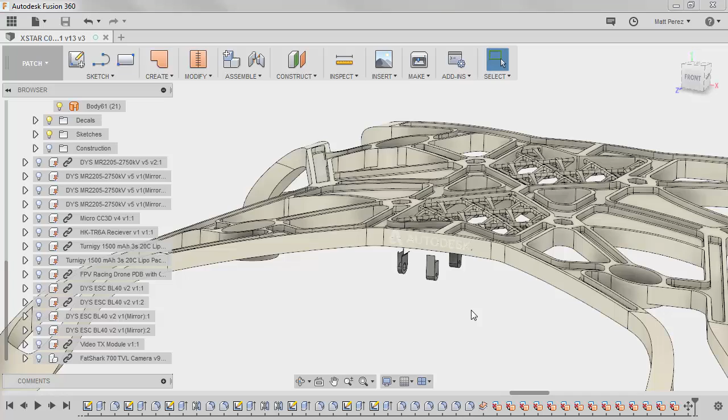Now that we have our copied surfaces or our offset surfaces, we want to start to create solid bodies from those. So the first thing I want to do is start building the solid bodies, and take them up into the rest of the X star body. So I'm going to delete this fillet as well, and start with this edge here.

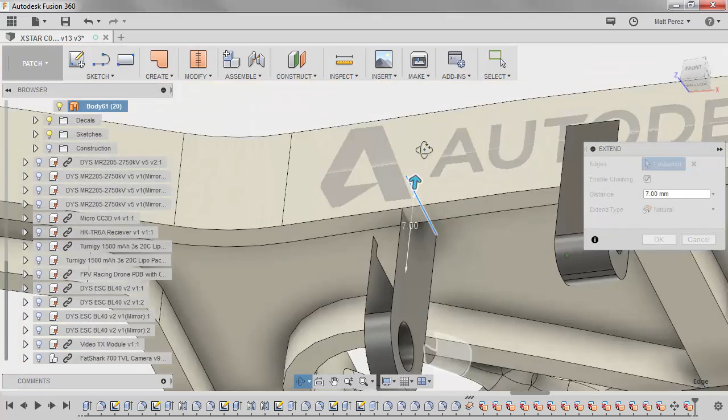I'm going to go to Modify, Extend. I'm going to take this edge up until it hits the inside of the solid body. Remember, it's okay to have a little bit of overlap, and it actually helps out as long as we don't go too far. So we're going to use 7 millimeters, and say OK.

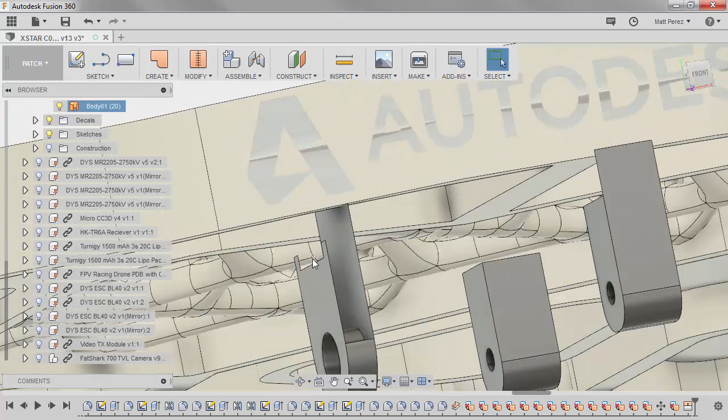So what this does is give me a good reference for where the rest of the body needs to sit. We're going to do Extend again, and take this edge and pull this one up. Notice that 1 millimeter perfectly lines up with this edge. I'm going to say OK.

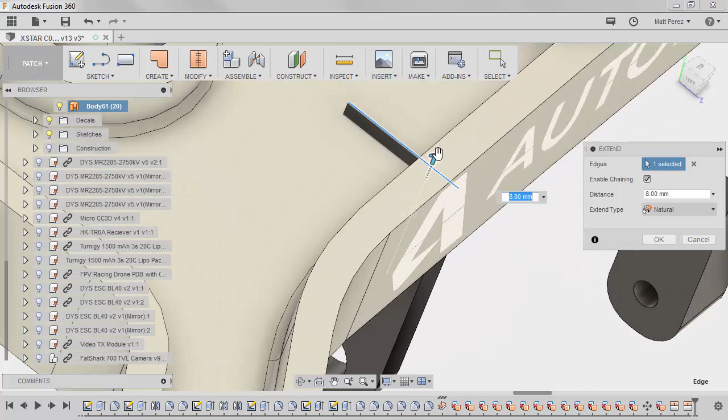I'm going to repeat the command. Now I have a single edge that I can pull up, and this time it's going to go up 8 millimeters. Notice that 8 millimeters comes up through the top, so we'll take it down to 6 millimeters.

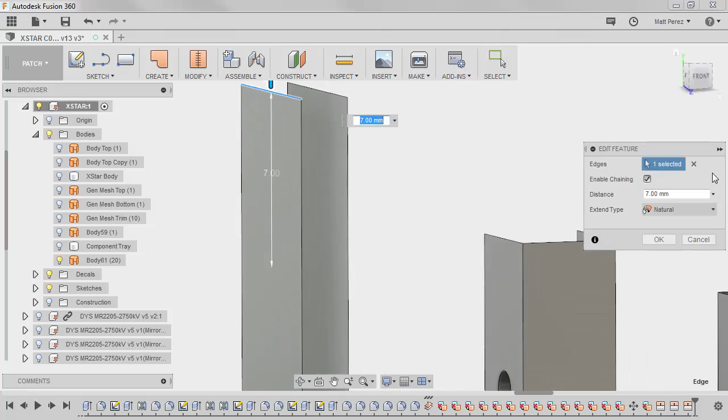We'll say OK. Now I want to temporarily hide the X star body. I want to make sure that these end up at the same level. So I'm going to edit the last command, and note that if I take it to 7 millimeters, it'll still be inside the X star body, but what we're actually doing is taking them up to the same level.

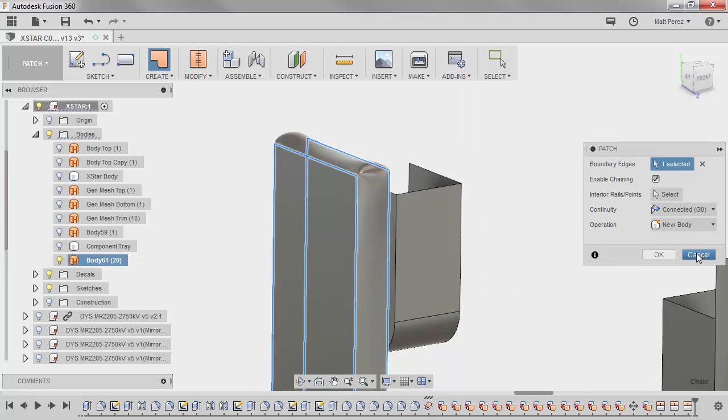Next, I'm going to build a patch between the two. Now you notice that if I select this entire thing, it doesn't allow me to keep these sharp corners here. So in order to connect those, what we can do is loft from one side to the other and say OK. Now we can build a patch for this opening on the side. Notice when I do this, it's trying to select the entire opening because we have enabled chaining on.

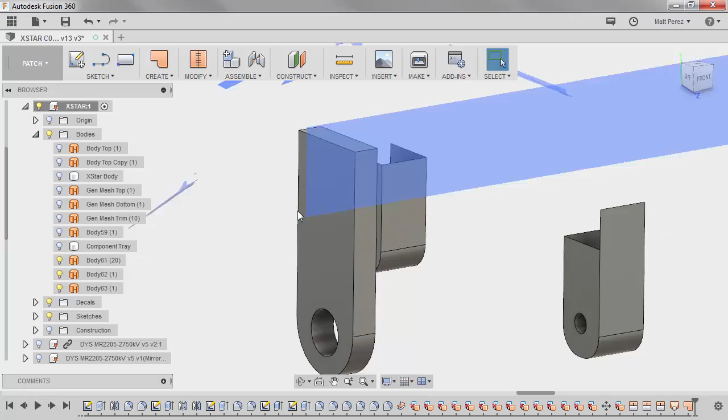If you turn chaining off, then you're able to select those surrounding edges. We're going to repeat the process on the other side, making sure that enable chaining is turned off.

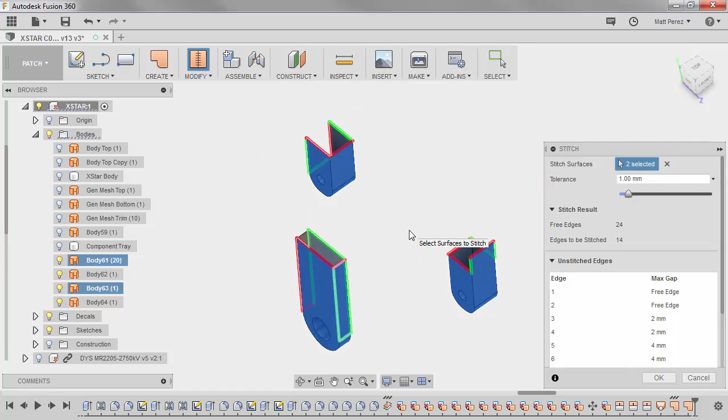Once we have all of those completed, we're going to modify this, and use the stitch option. Notice that when we do this, it's trying to stitch all of these bodies. Because they were originally one big body and we deleted faces, they still are all contained as one.

Now in order to break them apart, we need to go to Modify and Unstitch, select them, and say OK, and now they're each individual surface bodies. So now when we go to Stitch, we can select each individual face over here, and put them together as one body.

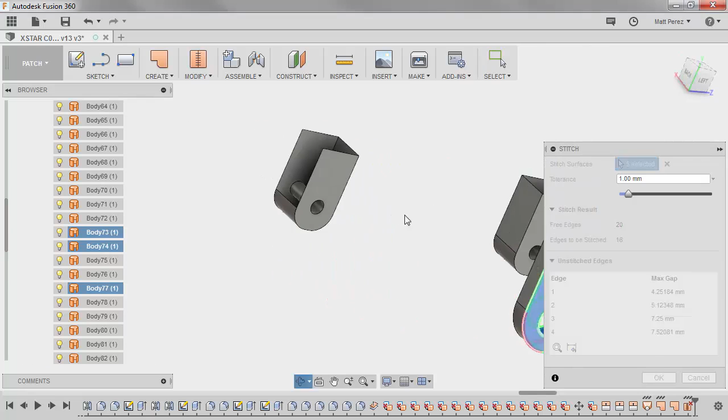Once we have a closed body, and you can tell this because we have green edges all the way around, no red edges telling us that we have an open surface, we can go ahead and say OK. Notice that this is now converted to a solid body. So we took the open surfaces, built the rest of the geometry, and made it a solid body.

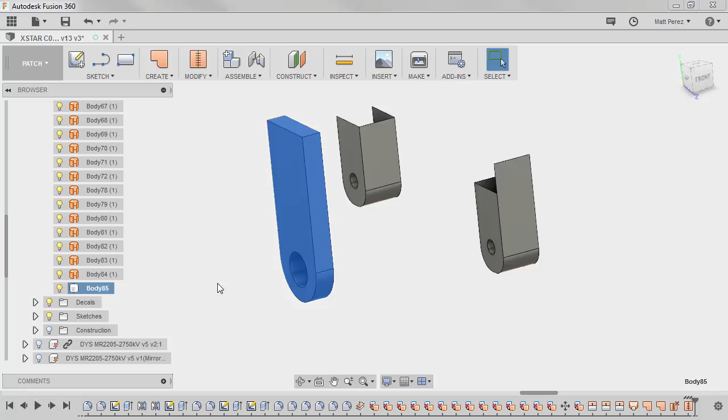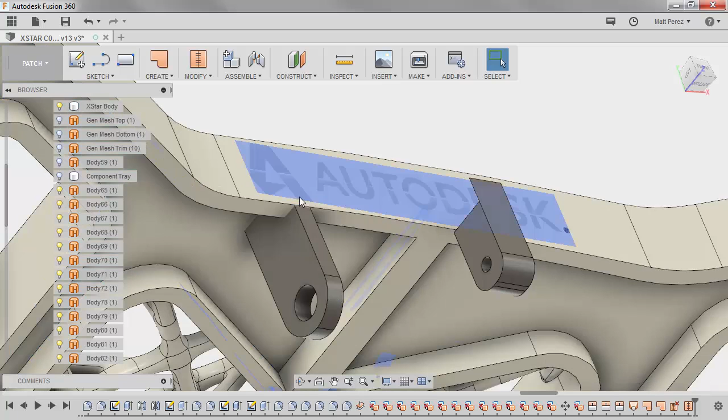This means now that if we want to, we can go back to the X star, and combine these two into a single solid body. This is actually very good orientation because it carries this geometry back down to this face, and also brings it up into the higher I-beam shaped wall. So it's going to give us a little bit of additional structure, and then we can add some fillets and blend it into the rest of the X star body when we get to that point.

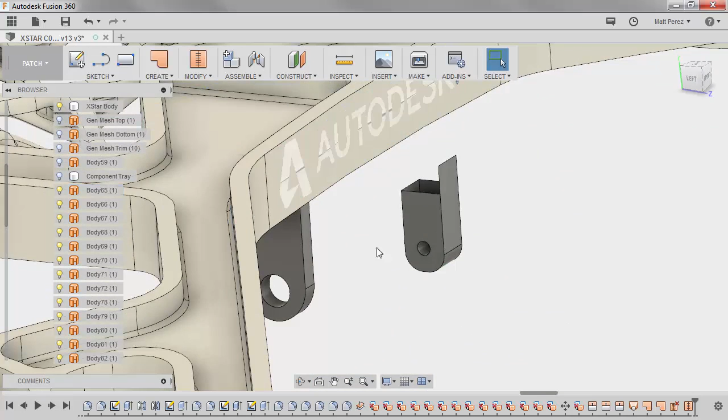The next thing that we need to do is build this set of surfaces back into this body. Now we can do it a few different ways. We can just come up and go back like we would with some simple extrudes, or we can try to blend it backwards. To get started, I'm going to go to Create, Offset, and offset that front face.

But I want to turn off chain selection. This will allow me to grab just a single face and not everything that has tangency. We're going to say OK, and then we're going to hide the X star body.

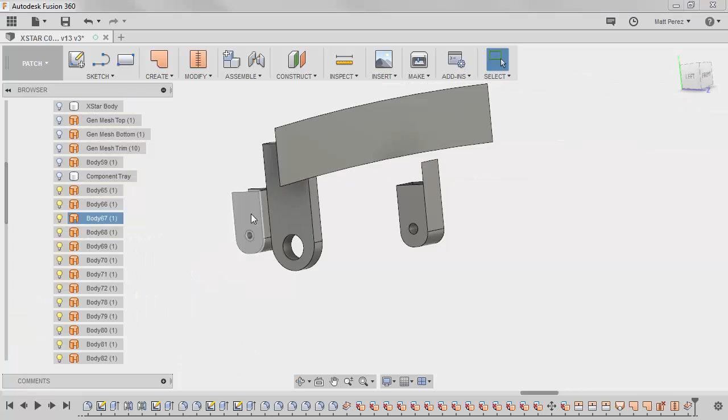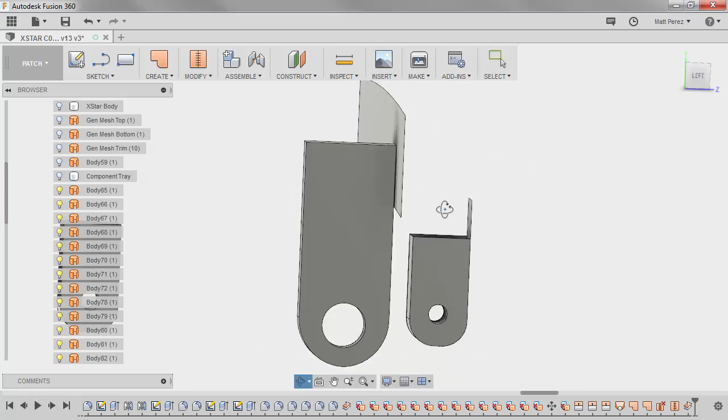So now we have this single front face to work with. And as we take a look at this, you'll also notice that we have a small gap between the front face and this body. But since we're intersecting with solid geometry, the wall thickness of 2 millimeters here, this will be okay and it won't produce any errors when we go to do a 3D print and convert it to an STL file. But keep in mind that those small gaps can be problematic if it goes the other way and you're leaving a small space in between rather than having that solid geometry overlap.

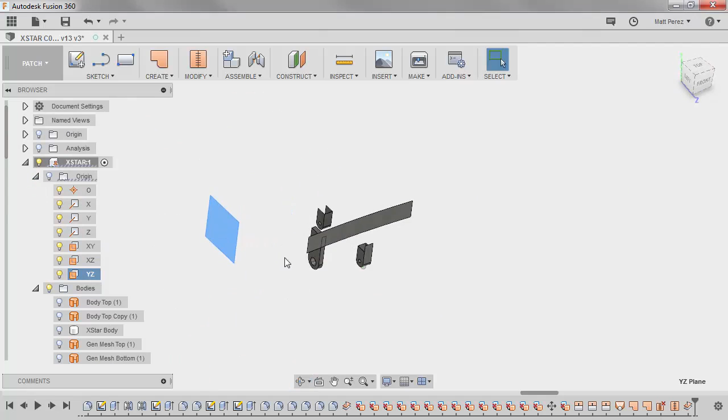So in order to carry this back, I'm going to start with a sketch. From my origin, if I take a look at the sketch planes that I have, my YZ plane is centered on my design. If I start a new sketch on the YZ plane and I select Sketch, Project Include, Intersect, and I come over to these surfaces, you can see that that plane actually intersects with those surfaces, and this gives me a good reference.

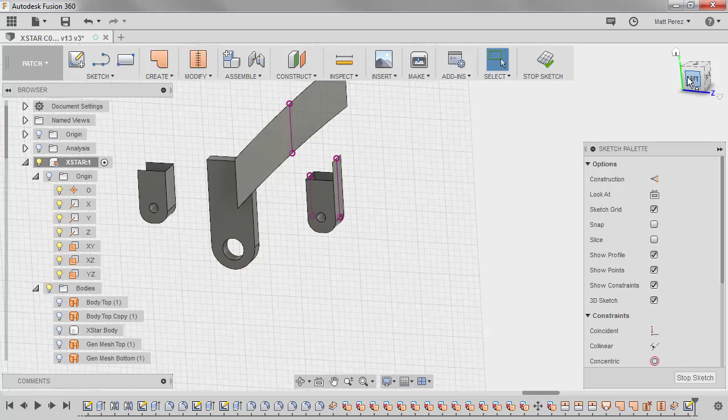So this tells me that I can draw a path where I want to blend this back in, and I can use that path for a loft or a sweep or some other type of operation. So I'm going to come back, and I know where the top position is, and I know where the bottom position is of that face.

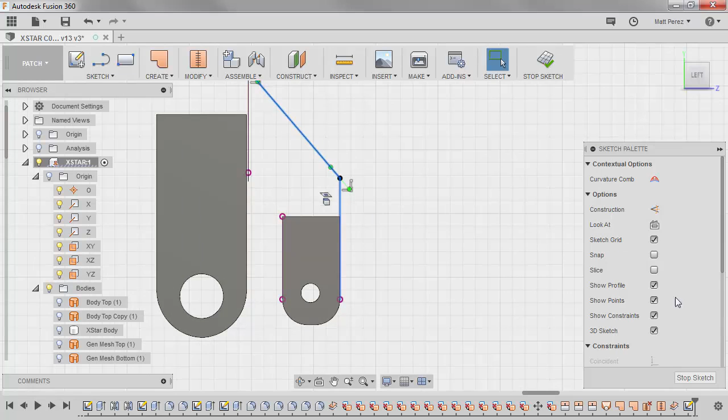And I'm going to connect it with a spline. So we're going to come into spline, we're going to start from here, we're going to go to here, and we'll say OK. I'm going to select the spline and control select this edge, and I want to apply a tangent relation. So now I have a tangent constraint.

And then this edge here we can either make horizontal or we can blend it in some other way, but I'm going to take that edge and say horizontal. And then lastly, I can drag these out and I can change the weight of influence that happens here. So we have a tangency here, we have a horizontal here, and we can control the shape of the curve by adjusting the weight.

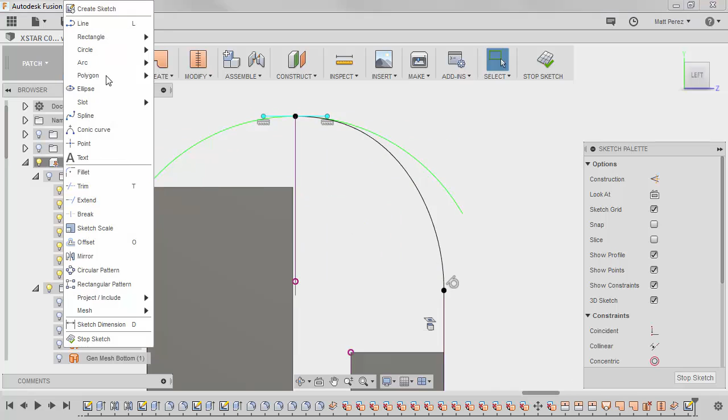The next thing that I want to do is I want to go to Sketch and I want to create an offset. So I want to offset this as well as this, and I want to bring it in. It looks like it's somewhere between -4.5 and -5. So I don't think we're going to get an exact amount here, so I'm going to say -4.5 and OK.

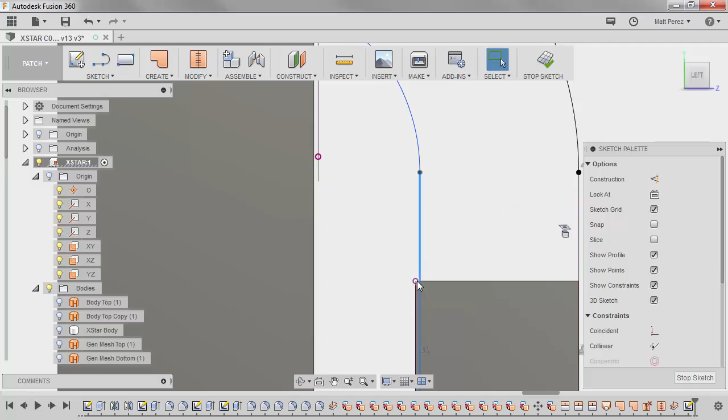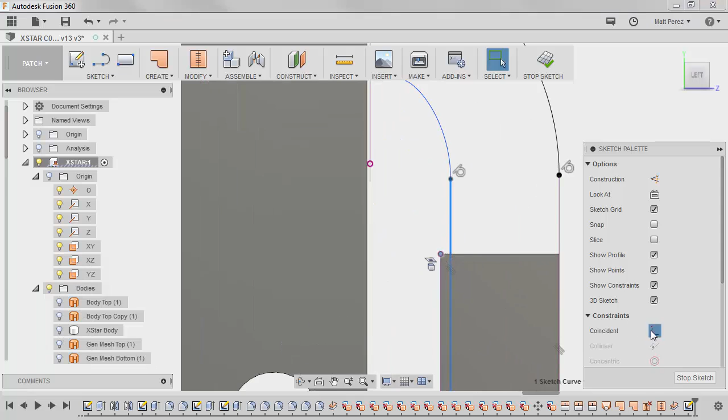And then I want to delete this dimension, and I want to make this line coincident. Now notice that it gives me an issue here, because if we select this and we look at the constraints that are applied, we have an offset constraint. So if we get rid of that offset constraint by selecting it and hitting delete on the keyboard, this line is now free to move in and out. We can now make it coincident with this point, and now it's fully defined.

Now with surfaces, we don't have to worry as much about intersecting with this edge because we can actually take this surface and we can extend it out past and then use that surface to trim. So let's go ahead and see how this works for us.

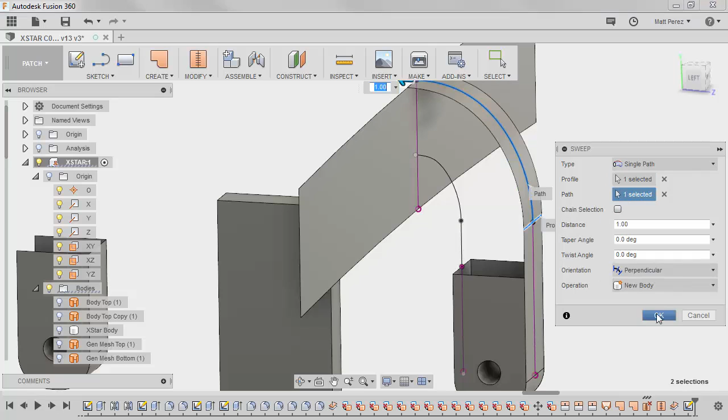We're going to stop the sketch, we're going to go into Create, and we're going to select Sweep. We'll do a single path, and for the profile, I'm going to turn off chain selection, and I want to use this edge. For the path, I'm going to use my spline, and I'm going to say OK. So now I've taken this edge and I've done that nice smooth spline transition completely up to the top.

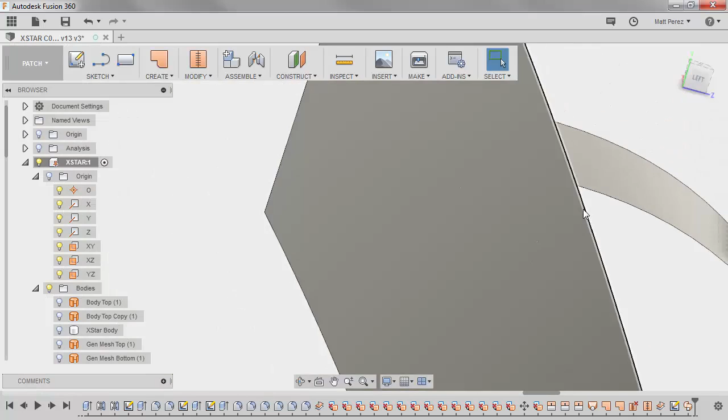We also should remember as we're doing this that this top is not completely flat. So the top is not flat, it's got a little bit of curvature to it, even though it's right at the center. That could produce a small problem in just a second when we go to thicken this or when we go to create a solid out of it. One way that we can approach that is by taking a look at the sketch that we created. Let's go ahead and show the sketch.

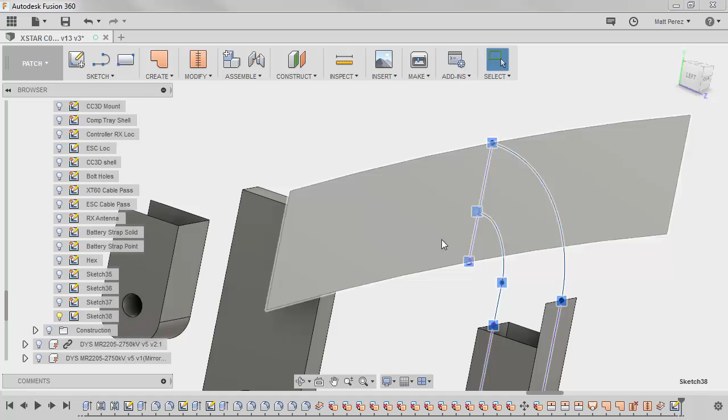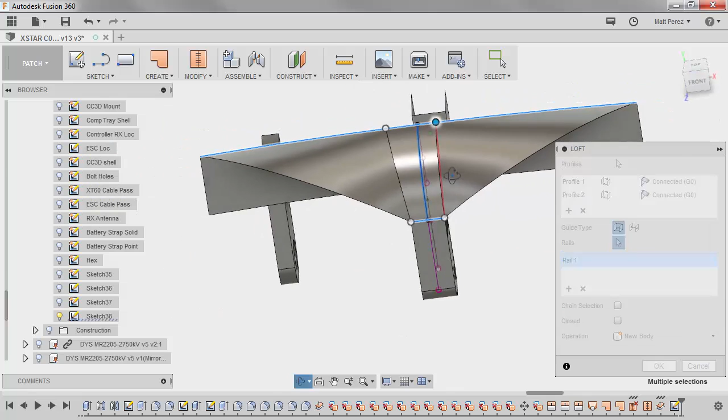When we create our feature, we can do a loft, and we can go from this upper edge, we're going to add a new profile to this edge, and for the rail, we're going to add the spline. We can drag these in. Now we're not going to get it perfectly parallel, but we can drag them in, and we can get it fairly close by visualizing it, and that way we're going perfectly to that shape.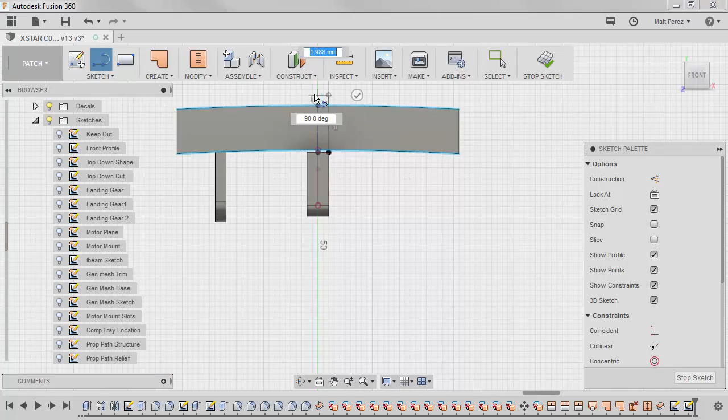Another way that we can do this is to start another sketch. This time we're going to create a sketch on our front plane. And we can trim this surface by creating lines that go straight up. And I'll make this line vertical. We can go to Modify and Trim. Use this sketch as our trim tool, and we can remove both sides.

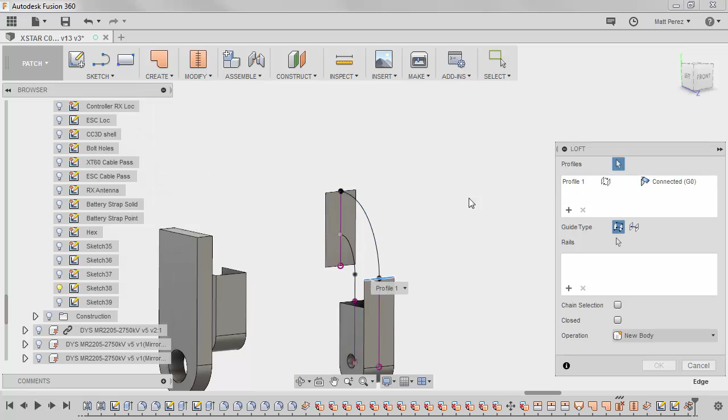We'll go ahead and hide that last trim sketch. Now if we come to create loft, we can go from this edge to this edge, and we can use our spline as our rail. Now note, because we are using edges of surfaces, we can add tangency constraints, so we can make sure that we keep tangency across this to keep it nice and smooth.

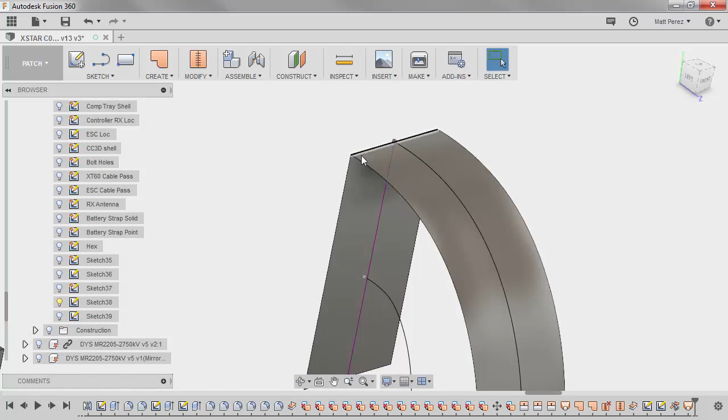So now at the upper edge of our X-star body, we know that our surface is going to perfectly match. So we no longer have that small gap here. So we don't lose any of this work, let's make sure that we save our file so that we can carry on building this solid body.